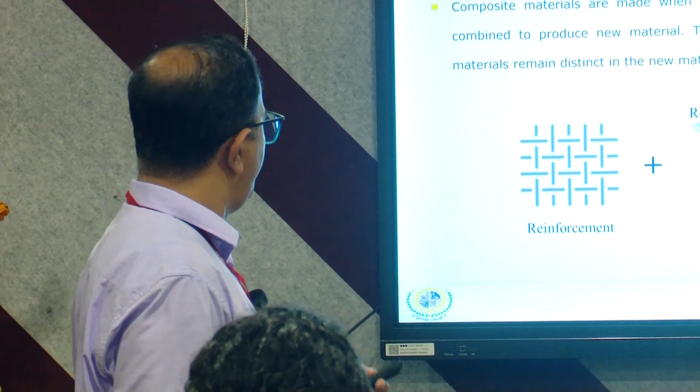So, we know composites are reinforcements plus matrix together. That gives rise to composites. Now, as per our previous discussions, often fibers contribute more towards the strength rather than whatever matrix or polymer we use. So, when we go through mechanical testing, we have an idea that results may come out in a particular trend based on our exposure to the literature.

But when we try to characterize it, get deeper into it, study the microstructure, there are n number of things which may be affecting that particular value of strength. So, when you get a quantitative value, there are many qualitative issues which contribute to that value. Sometimes you must have come across a situation wherein we try to report something and we find that in literature they come up with a slightly different trend. So, when you only put up the quantitative values, those trends may slightly differ when we compare with our results.

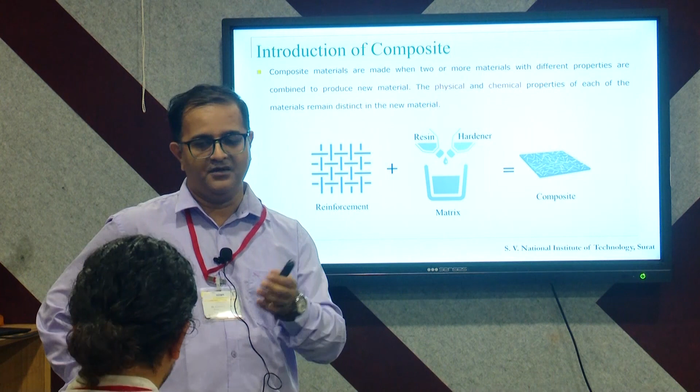The reasons may be n number of things. The way we have made a composite and the way somebody else makes it, there would be some difference. Now, just imagine the demonstration we had yesterday, when we infuse the resin in a vacuum bag and then we allow it to cure.

Definitely today's weather will have its effect. Since yesterday evening the weather has slightly changed, and because of that its effect will come on it. Now, that is a noise factor; we do not include it in our consideration, and once we go for testing we also forget what the situation was on the day of curing. So, that may not be the case with somebody else.

So, the way you fabricate a part and test it at a certain place, you do not have control over the environment. Similarly, there are many other factors which come into the picture. Even with the same type of raw material, if you are procuring from different sources, you get some different result. That is also one of the vague observations which we have made. So, only a quantitative value often leads us to some sort of error.

I remember in one case, in one review of one of our papers, the reviewer doubted our results. I do not say that he doubted our efforts, but he had doubts on the results, and he concluded all his confusions into it, and he asked why you get this result, I am not able to agree to it. So, what we did was we measured those things again, we recorded it, we video recorded it, and with our reply we attached the video.

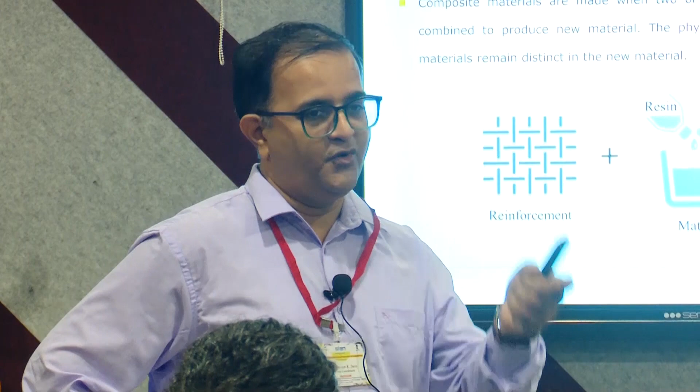And after the 6th review that paper got published. It took almost 2 years to publish a paper. So, now when you see that paper, you find submitted on so and so and accepted on so and so, and the difference comes out to be almost 18 to 20 months. So, the thing was, a value can always be doubted. Just because the machine changed, the way that machine was able to measure something was different. So, often it results in some sort of confusion when we only concentrate on quantitative value.

Now, that happens more when the part is composite, because it can have natural fiber or it can have man-made fiber. It can have particles. Particles can be nanoparticles, they may be conductive, they may be magnetic, they may be something else. You may be mixing two polymers if you are going for the SLS process, and those polymers would have their own individual way of behaving with temperature, with heat. So, n number of possibilities you come across. If I talk about nylon as a 3D printing material and nylon as a whole which I get from the market, the grade would remain the same, but they will show different results to me. Now, when I want to make a comparison, often the trend line does not match.

So, when you see the papers on polymer composites through 3D printing, you will always see that the trend lines are quite different. Maybe you can refer to Raghav's report in the lab. He has put up graphs. The other guy, maybe Arjun, has put up the stress-strain curves, and if you see those curves, everything is totally different. They do not come to a single trend. Same material, the exposure time changed, the way you exposed them for curing changed, and a large number failed because of that. Now, that you cannot put in a paper.

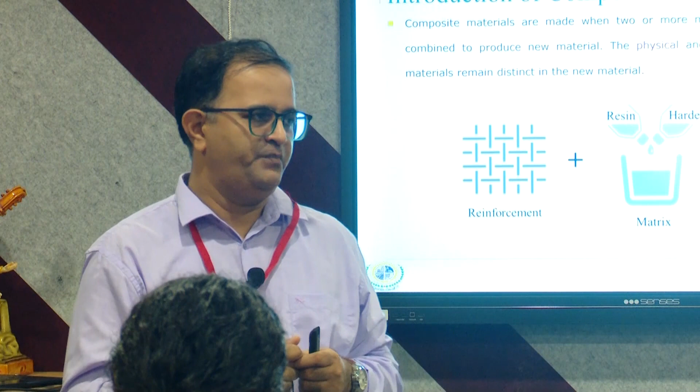So, in such situations where a value does not help us to conclude some result, characterization comes into the picture. If you go into the microstructure, get into the structure yourself and just try to observe it, it may give you the results: something delaminated, something got pulled out, there was no affinity between these materials. If you see those things, you are probably able to make a good judgment with the value that you get through the measurements. So, in such situations only focusing on, say, mechanical testing may not be enough.

Often we feel that I did all these things which are there in so and so paper, I did the same thing, I did 2 more tests than them, but still my paper did not get accepted. Why so? Probably the reviewer wants something to substantiate our results. So, there characterization one way or the other comes into the picture. Nowadays, because of the grants which DST has been disbursing everywhere, good facilities are coming up in almost all regions. So, we can easily utilize those facilities to get some characterization results and include them in our work.

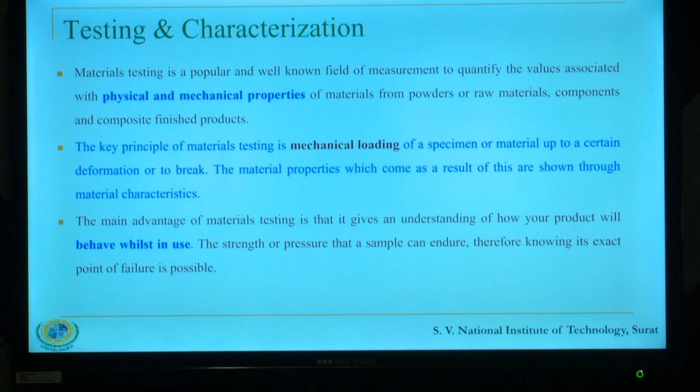So, when we talk about the testing of the materials, we largely concentrate on quantifying the physical properties or mechanical properties, and these values in most of the cases come through mechanical loading. A part is loaded mostly in the axial direction, and because of the deformation that occurs, it gives certain results to us, whatever be the process. In all those processes, we are required to load the specimen under mechanical action.

So, in almost all the processes there are standard specimens, standard dimensions. Of course, they have a certain range of dimensions, but those are standard dimensions, and it is expected that the material would actually behave similarly to the results we obtain when it is put in the application. So, that is why we intend to carry out these mechanical tests.

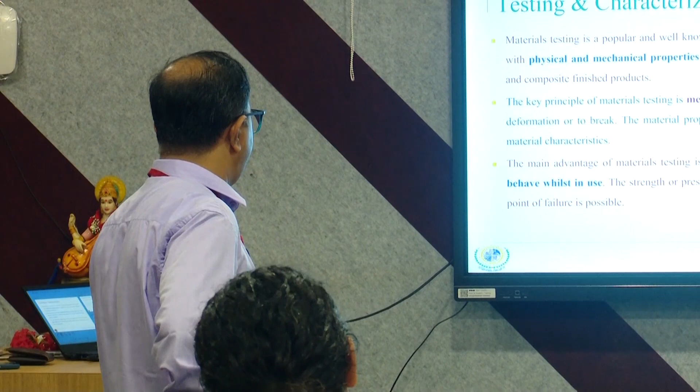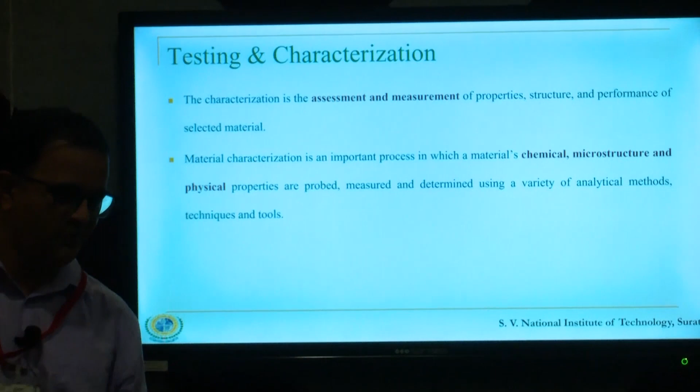Now, as compared to that, when we talk about characterization, we not only restrict ourselves to physical or mechanical properties, but we go beyond that. We want to not only measure, we want to assess the internal structure, we want to assess the performance. And by internal structure, we mean the way in which heat flows into it, the way in which the molecules are arranged, the way in which the grain boundaries are defined, the way in which electrical conductivity takes place, the way in which the structure behaves, maybe under impact or under continuous load.

It can be anything, but the thing is we want to assess what we are not able to see through our naked eyes. So, along with physical properties, we also concentrate on the chemical properties and the microstructure of such parts.

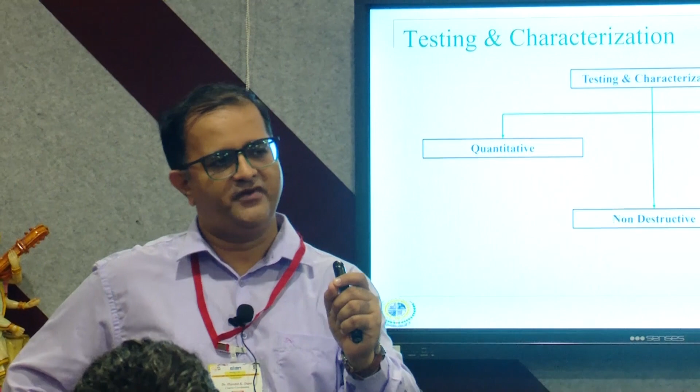There was one interesting result yesterday which we had discussed, how a continuous fiber was put in between polymer when we passed them separately through the nozzle to print. Ideally the continuous fiber should be covered by the polymer, but through some microstructures we observed that it remained on one of the sides, and because of that, it becomes a place where it can fail, because it is easier for the fiber to get pulled out from the polymer. So, that we come to know when we see it.

Had there been a situation where the fiber was perfectly placed at the center, then it would have given a different range of strength values. So that difference is visible through such microstructure analysis.

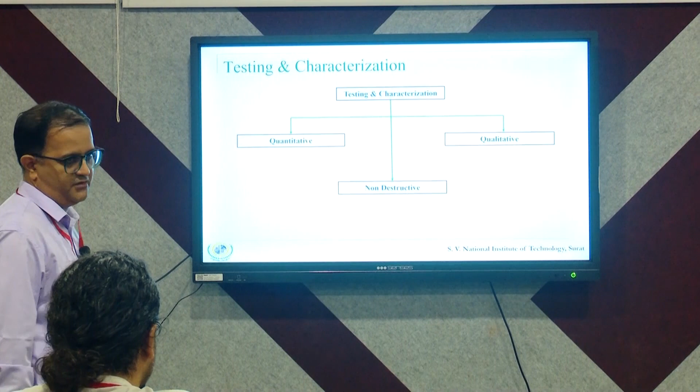So, all the processes which I want to discuss right now, I am trying to put under three different banners. This is not the only way in which we can classify them, but this is how I have tried to combine them in the further slides. So I wish to talk about quantitative methods and qualitative methods. Non-destructive is something which I am not touching. Altogether that can become a separate session, so I am not discussing it in this session.

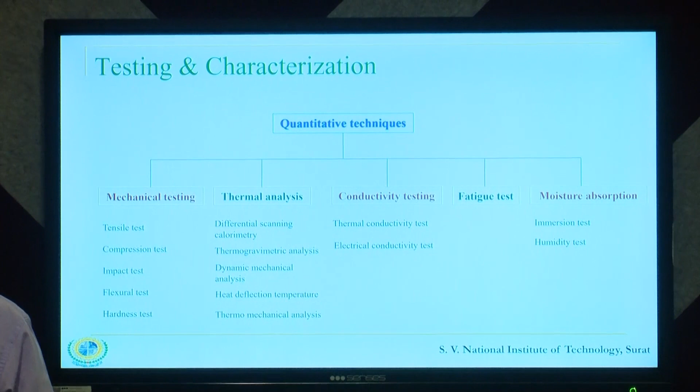There are many more processes which can be included in this list, but these are a few of the processes which are being referred to regularly in recent times. So we tried to include those techniques. Largely they are mechanical techniques, thermal analysis, conductivity testing, moisture absorption.

Fatigue test is something which is debatable, and I had a debate with my friend about why we don't put it under mechanical testing, and he showed me two online books where there were mechanical test and fatigue test separately. So the only logic, which I also agreed with, was if a professor can keep it separately, why can't we also keep it separately? So I went with his choice, but it comes under that domain only, and we kept it as it was available in one of the resources.

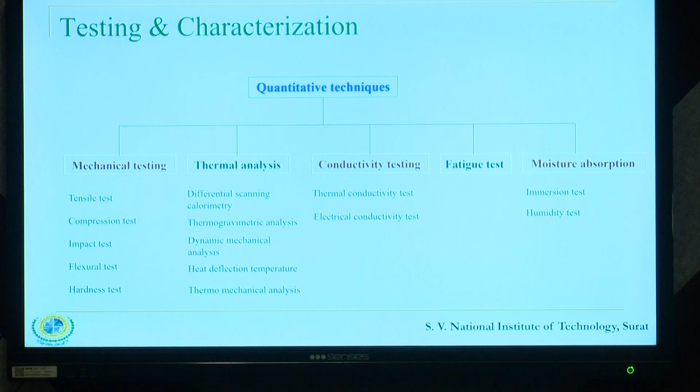Now mechanical testing, this would be a revision for all of us, because we have gone through all the processes at one time or another. When we are trying to study the behavior of materials under different loading situations, we may choose certain processes for specific study of mechanical properties. So we may go for tensile testing, compression testing, flexural testing, torsion, creep, hardness, impact, and fatigue. These are the things which we would largely concentrate on.

Now it depends upon what specific raw material we are targeting, and that particular raw material may have a specific application, and for such an application we may be required to go for specific tests. A few days back, I had a long debate with Janish. He wanted to conduct open hole tensile testing as part of his MTech dissertation.

So we have carried out impact testing as well as tensile testing in his work, and he said that, sir, I have time and there are resources, so let me also go for this open hole tensile testing. So my question was, if you are working on Kevlar, why do you want to go for tensile testing? Kevlar more or less has such applications where it has to undergo impact. So if you want to study impact, go into more detail of the impact study, why do you want to go for it? Then we stopped that discussion, because we got busy with the program.

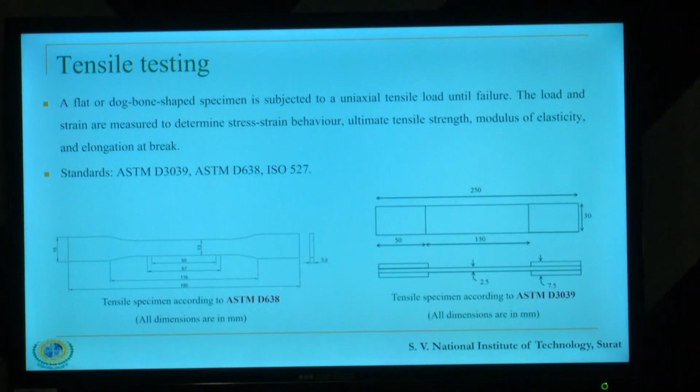But more or less, there are certain standards which are being followed for tensile testing, and in certain conditions we need to go for a dog bone shape only, and in some cases we go for flat specimens. So, accordingly there are two major standards, D638 and D3039. Now, there is an interesting thing: when we go for D3039, and in some cases with a dog bone shape also, we require to put a cover on the edges. What do you call that cover? Yes. So there the requirement is that it should be made from the parent material.

Now, when you 3D print that part, how do you put a parent material on it, unless you include it in the design of printing? Only when you put it in the design can you have that cover. So, altogether when we use a 3D printed part, we avoid going for that, and it is a usual convention. But when you make the same composites by some other processes, then it is a requirement, and if you see the literature, they would say that as per the standard we have put it up.

In our case also we had used emery paper, because the base parent material was slipping when we were trying to hold it. But in the same situation with 3D printing, you do not do it, because how would you create a cover without printing for a printed part? Now, if you include it in the design, then it is against the dimensions that are required. So, those things are always debated.

Even I put the same question when I am a reviewer for some paper, why you have not included it, and it is always interesting to go through the answers. It helps because when you have to reply, you have n number of options by getting such replies. So, there are many open ends where they can work further in defining the standards.

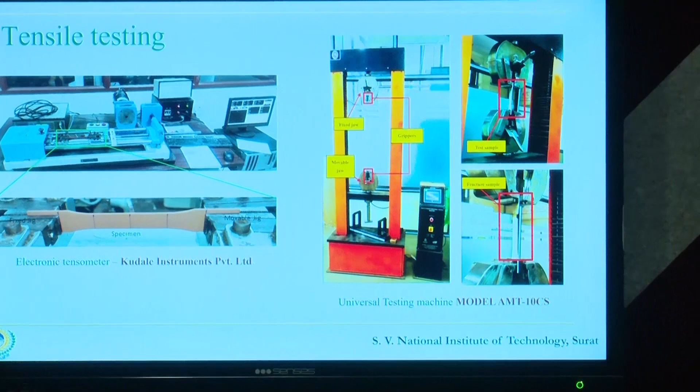It came to our department in 2005, and it was the only machine that was not affected by the floods of 2006. Everything else in the workshop and manufacturing section was underwater. It was saved because it was light in weight, so they thought, let us put it on the first floor. So, this was the only machine in our workshop and machine tool lab which went to the first floor and was saved. Everything else was in water, including faculties.

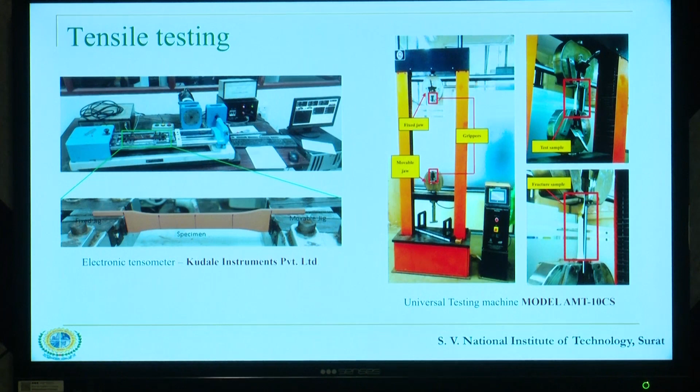Since 2005, this machine is working effectively even today. No major repairs, some changes of spares, and we go for regular servicing of it. We go for regular calibration of it. This is a good machine that way, and it is a cheap machine. Even today it comes around 6.57 lakhs only.

Is it adding anything different from this? No, the thing is, it can go up to 20 kilonewton. The load cell is up to 20 kilonewton only. So, it serves our purpose. But you can conduct tensile, compression, flexure, shear, everything. All attachments you can have into it. Yes.

That would be interesting to see. They will show you. And why in some specimens do we do that open hole testing? Open hole testing is specifically planned when, in the design you have, a part is to become part of some assembly, and that part will definitely have a hole into it so that fasteners can be attached to it. That part behaves well, but whenever it fails, it fails at that hole only.

So that is why for certain applications where you need to design a part with holes into it, other than tensile testing, we go for open hole tensile testing. And there are two different dimensions of the hole also, so there are two different sets of standards for studying it, depending on the conditions that it will undergo. And it was interesting when we tried to study the same for 3D printing.

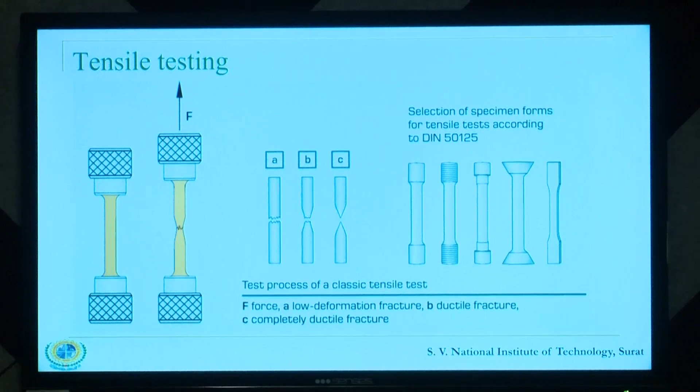It's also known to us that as per the standard there are different ways to prepare standard specimens. I hope I am not restricting your view. We will be able to select different shapes and forms of standard specimens.

The way fracture usually happens is in 3 ways: a low deformation which leads to immediate failure, sometimes necking initiates and then we see failure, and sometimes necking extends to a very high value before failure. In each case we see a separate type of stress strain curve, which is always interesting to interpret, but in general this is the stress strain curve that is commonly used.

I will not go into that detail. So these are the 2 different tests that have been performed at our lab.

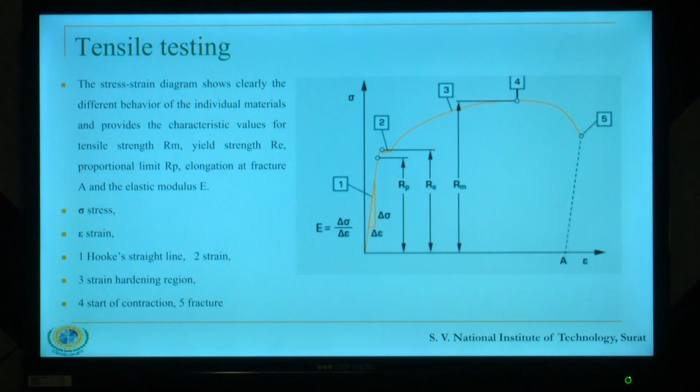Did it break? Yes. When did it break? Let me see first. Yeah, that's what I was saying, because when I use a laptop I usually keep the voice off.

Interesting, huh? Who did this experiment on natural fiber? The whistle was good, I suppose. So I think this is the copper infill PLA copper, okay, and this one is the natural fiber, I suppose, jute and flax, I suppose.

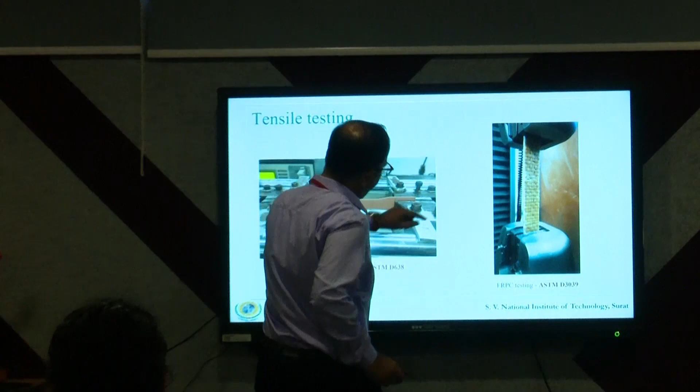The thing is, the dimensions get a certain range. So when we go for cutting, if you're working with a certain size of fabric and cutting it into the minimum size, you only get 2 strands of it. You may cut it this way and get only this much portion. That won't help us get the desired result, because it's going to fail immediately and delaminate very soon. So you need to go for extreme dimensions.

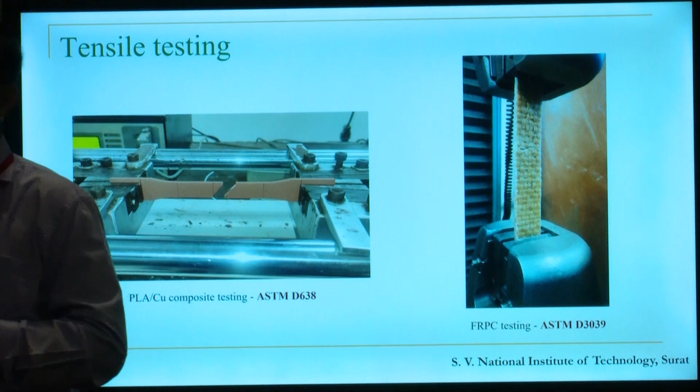Rather than selecting this standard, we went for another standard. The first results came from experiments with the metallurgy department at IIT Bombay, who suggested it's better to go for another standard compared to this one. Creating a dog bone shape was also not a good idea, because ultimately those are fabrics.

If you cut it at a particular position, there are chances those portions may get pulled out easily. So these are cut by abrasive water jet machining.

Laser was an option, but we observed that at the edges the fibers were burning, turning black, and those portions were getting burnt. We also observed that the resin burns too, creating a foul smell. So we avoided that, and that was one reason. The other reason was that the machine was available with us at that time, so that was a better choice.

Eventually, our abrasive water jet machine went into maintenance, and we had to seek support from outside because we had initiated with abrasive water jet. So we had to use that, and when we went for outsourcing it, it became even more expensive than laser cutting. But you cannot change the strategy somewhere in the middle of your work.

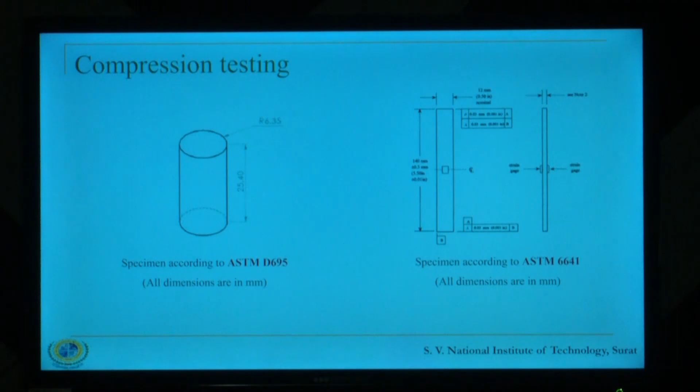Same way for compressive testing, we have different standards. Usually D695 is what we have used. There are two different sets of standards depending on what dimensions we produce, and by and large, especially for 3D printed parts, D695 is the standard that is preferred. The reason being that the design is simple, material utilization is less for printing, and you get better parts, maybe faster printing also.

Usually compression test is not meant for metallic parts. Tensile tests give you the required information. So compression is largely for those materials which are used in building applications, or maybe those related to polymers.

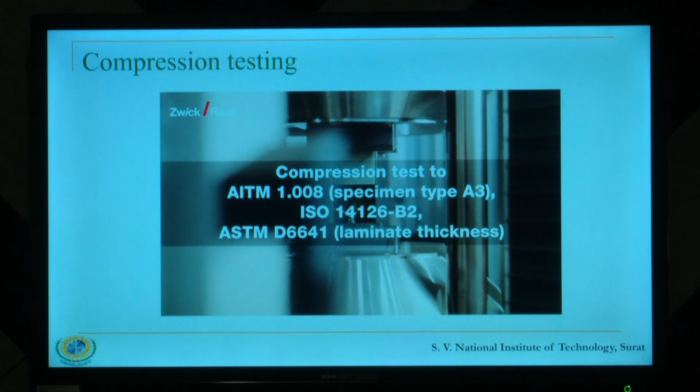Same way you have a standard curve for this process also. Now we are outsourcing the compression testing, because ours were not that clear to put up. In compression, you observe more of delamination as compared to tensile testing, so breaking of the fibers is often not the case.

Flexural testing is an interesting test to do, because any part that gets into applications where there is more of dynamic action has to either undergo bending or twisting. So when we go for parts where different 3D printed parts have to become part of an assembly, it is necessary that we go through the bending of such parts.

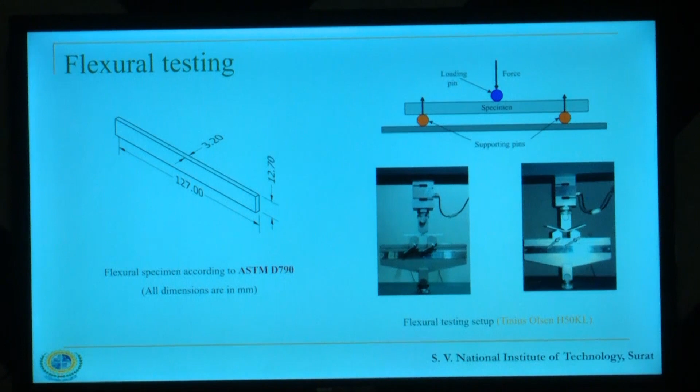Now, when you see these dimensions, these may be the dimensions we selected for this task. It may not be only 127, it may be a range of values, and from that range we may have made a selection. Sometimes there is a thumb rule into it: the width that you select gets into a thumb rule for the length or the other dimension. So to set a minimum value of width, along with that a certain length comes into picture.

The other day I had discussed that in order to achieve a certain thickness of a test sample, you were required to place 12 layers of fabric. Yesterday we tried with 6 layers, I suppose, but for the specific thickness required, you needed 12 layers. So that became a limitation, that now all planning has to be done with 12 layers. You cannot go for 14, you cannot go for 10. So the study goes with those 12 layers accordingly.

So once you fix up a certain dimension, the other dimensions come into picture. Otherwise, why would there be 127? Somewhere I also remember that the dimensions came with 2 decimals, and then that was rounded to the higher full value. So those are things, but then we have flexibility in a range of the dimension, and we have to ensure that dimension falls within that range.

Suppose we are having a gas turbine blade, and in the gas turbine blade we are putting high pressure gas. In that case, it will be fixed at one end, and it will be bending as well as twisting. So these two different forces, how they will be coming in this test, is shown in the diagram. The part under application, if it is undergoing some sort of bending, you may have made that part following certain safety standards. So we always take a certain factor of safety, based upon what maximum bending would be encountered by the part.

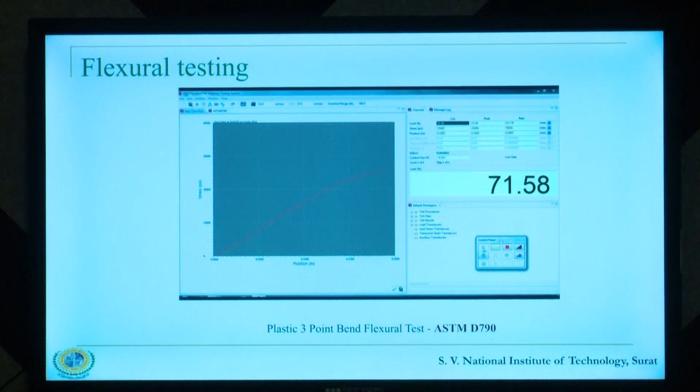Now there is another interesting thing. We have two machines for impact testing. One can work up to 25 joules of energy, the other can work up to 100 joules of energy. The suppliers are different, the softwares are different, so their decimals are different. One has 3 decimals and the other has 2 decimals. Because of that, the graph that you get is totally different.

So if you want to compare a part, depending on selection, if it's printed with carbon fiber or even glass fiber, it does not get checked with a machine below 25 joules. If you check those parts with the other machine, it will give you data you will not be able to compare. So even the softwares with the machines, the way those machines are used, they give you a different perspective on the same job when you carry it out on 2 machines. This is why we have big factors of safety, because we are not very sure about this.

Traditionally Indians have always tried to play safe. We have very big factors also. Yes. That's why in the space program also, this factor of safety is not... Yes, yes, yes.

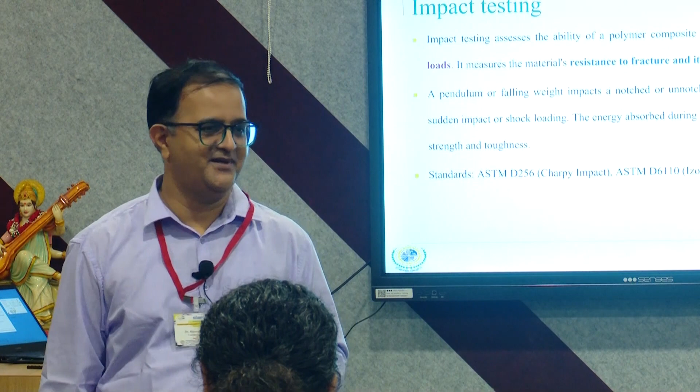So there are many observations which you cannot put on a paper, because you do not have anything to back up those observations. You can only discuss them, but you cannot put them on a paper. Impact testing is another interesting thing that we can carry out. Are we going for that testing now?

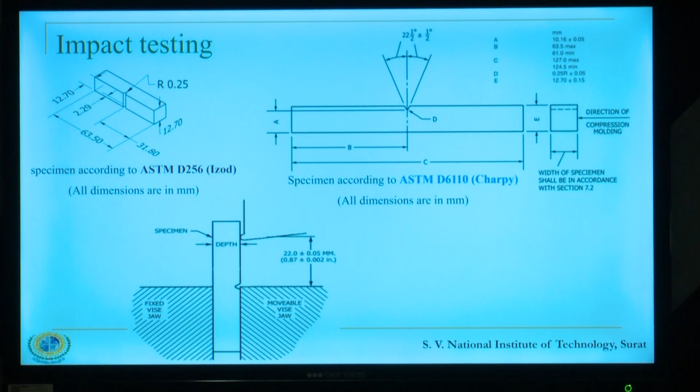So again, there are these dimensions. You see 31.8. That may not be the defined dimension, but it may come from some other dimension. When you define thickness and width, accordingly you define the length. Here you see dimensions A, B, C, D, and D has R in it. So the dimensions are interrelated, and they should fall within a certain range. That is a requirement. Again, some standards require a notch. In some cases, you don't.

No, even I thought when it comes down, it makes some noise, right? When the movement starts, before it strikes, you release it. Sir, it is the noise of that. It is able to move quickly. Yes. So when you release it, it has that noise, and then when it strikes. But then what was the third one? We have to stop it manually. That is not standard. So this machine can be used up to 25 joules.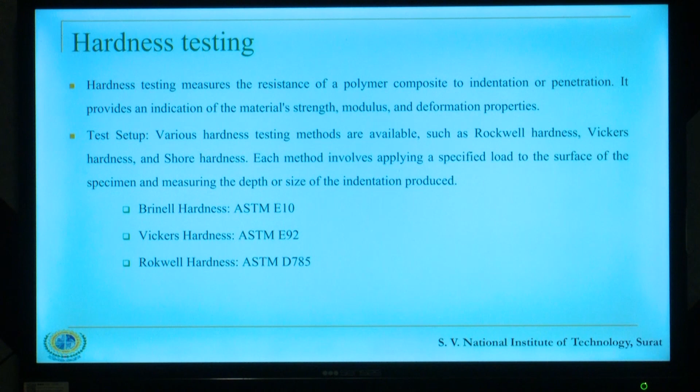Hardness: usually we go for 3 different sets of hardness testing depending on different conditions. Often this goes with the facility that we have. In case of Brinell hardness, our indenter is a sphere. You measure 2 values of the diameter of indentation, and it gives you the value.

In case of Vickers hardness, the indenter is replaced. Instead of a sphere, it is a pyramid. So there the diagonals of the square are measured. If it indents less, the value of D is reduced. If it is a softer material, it will indent more, and so the value of D will be more. So those 2 values are measured and the calculation is done.

When we did these experiments during our BTech first year, we had to observe, measure manually, take those values and do the calculations. But now machines do everything by themselves. They do not rely on us.

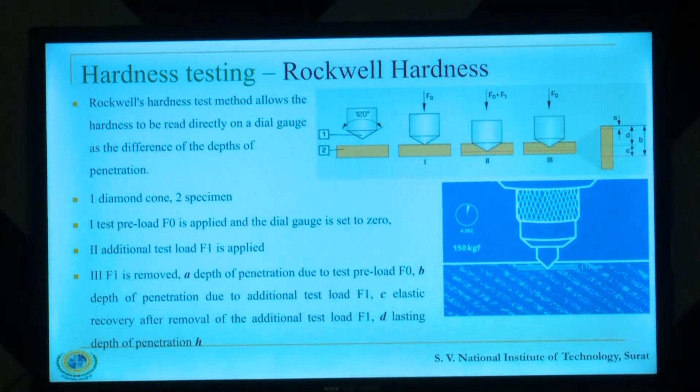And here you are required to do some calculations, but again nowadays software does it. This is interesting because you go for two different levels of indentation, and in that figure, if you see, D is the value that you are interested in. So initially when you put the first one at the first layer, when it is F0, it goes up to depth A, and then you add some force into it, it goes up to B, and when you remove that secondary force, there is some retraction, some reduction, and that reduction value is C. So D is something that we are interested in.

This may be something which may support when we are going for parts with reinforcement, but we do not have this setup. Thermal analysis is an interesting part. Up till now we were not that much focused on this study, but recently we got one machine in another department. So for the last 2 years we have been trying at least one sample and getting some information out of it. It is adding more information to our knowledge base, and of course to the publications also.

So there are many tests in fact, but there are 3 tests which are widely included. One of them is TGA, thermogravimetric analysis. In this thermal test, the machines are so sophisticated that you can fully rely on the results, and the other thing is there is minimum involvement from the operator. So reliability is increased a lot.

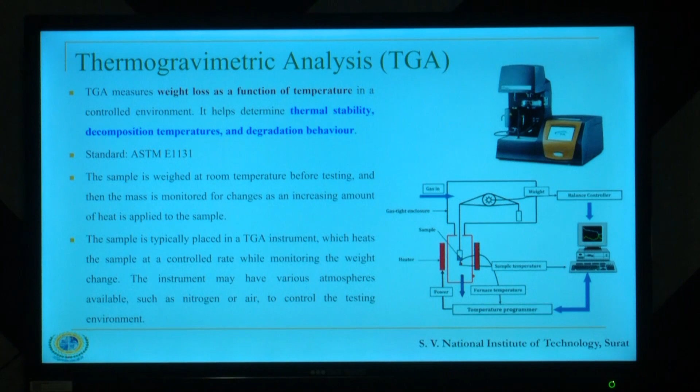So when we go for a TGA test, our intention is to study the weight loss of a part with temperature. So we have a setup wherein we put a small sample in a particular way. It is placed enclosed in a heater, a furnace sort of thing, and then the temperature is given over a regular course of time, and because of that heat, whatever is the loss of weight, initially you measure the weight, later on you measure the weight, and that loss of weight will give you some idea.

So this goes with the thermal stability, the temperatures at which some sort of changes come into it, decomposition comes into it, or how the part gets degraded. Degradation comes because there may be moisture in it, and its removal will also result in loss of weight. Sometimes the part may even partially burn. So those things are represented through a thermogram. So here, as you increase the temperature, there is reduction in weight.

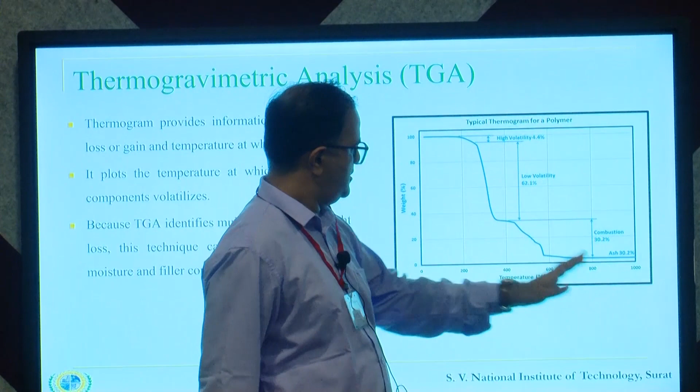This is a graph for a particular set of polymer. So if the weight is say 10 grams, percentage-wise it is 100% right now, and once you start heating it, the weight starts reducing, and initially there is some loss. This curve denotes a certain aspect of it, then the steep curve also denotes something, then it denotes something else, and then it becomes stationary. So whatever loss comes into it is represented by a curve, and we are able to make certain judgments from the curves.

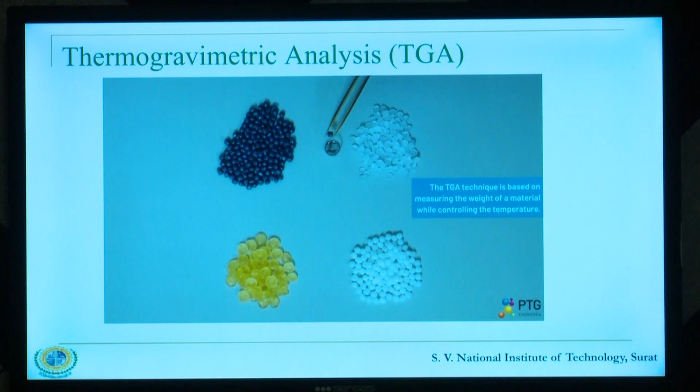This should be before my presentation. Yeah. Actually that was our plan. Our sequence was right, our actual sequence was right. Your presentation had that chart also.

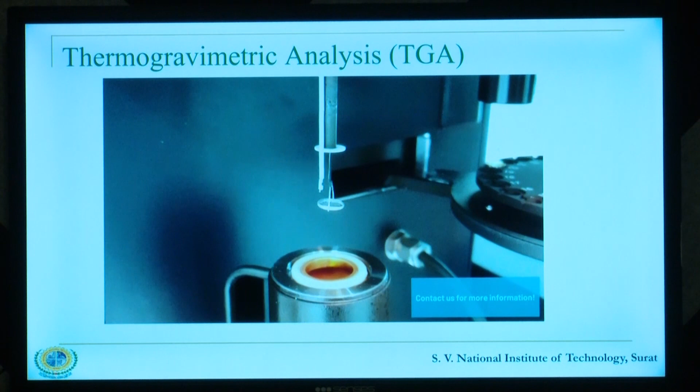Anything else? Interpreting. Yes, in any sort of system where you are using a machine, interpretation is the only thing. Even in SEM, you would see many images, but they are left without interpretation. In the papers also, if you see, believe me, it happened many times.

And the thing is, if I make certain judgments for my graph, this is a hard fact, you yourself do not know how to interpret it, so you have no other option as a reviewer but to believe what I am saying. That happens. Very difficult to prepare the graph, the thermogravimetric analysis, and to make the detailed explanation. Yeah. So, interpretation.

I'll tell you another example. There are a lot of connections with the other properties you have to explain with the reviewer request. Yeah, but if the reviewer puts up a question, then you include a reply to it. Otherwise, it goes unattended, and then thousands of people refer to it, and then they copy, and it continues. See, take the example of a statistical process, response surface methodology.

When you use software and feed your experimental data into it, immediately it will give you an analysis; it will prepare a model and an analysis of the model. Then it will give you a linear equation, 4, 5, 7, 10 lines of an equation, all parameters included, and it gives you a 3D plot. People represent it. Many times I have put up such questions in reviews or in the exams that I conduct at our place for our PhD seminars.

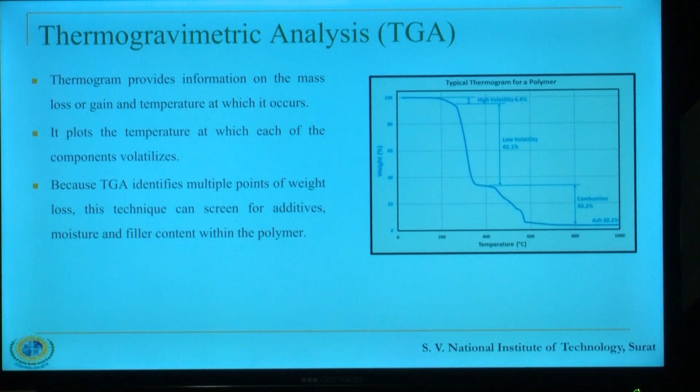Because the TGA that I have referred to, they are for polymers, mostly for non-metals, I suppose. I am not sure, but I have seen it for non-metals. Have you come across it for metals? Ceramics, yes. I'm not sure. Okay, but fillers or ceramics, full ceramics.

This is another thing, DSC. Here the study is about the heat flow, especially when there is a phase transition. So how the heat flows, does it get stored, does it get removed, does it flow promptly? Those studies come under this. Say for example there is a sample that we want to study; it has to be compared with a reference material, and whatever heat flow happens because of that reference is what is studied.

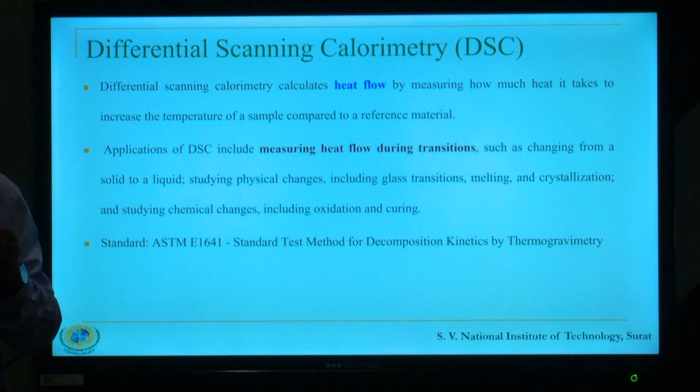So when we try to change a sample from solid to liquid, or when we are studying certain physical changes, whatever flow of heat takes place is included. This is one such setup wherein there is one sample, the other is reference, put in an enclosed situation, the test is conducted, and the flow of heat and the difference in temperature is measured: heat flow versus temperature.

So these are the changes. Glass transition takes place, then crystallization, then melting. So at different conditions of the phase, the flow of heat is studied. These thermograms help us make certain specific conclusions. Personally, I haven't included this in any of our studies, so I haven't interpreted it for any of our results. So what is the reference material? Reference material specifically I do not know.

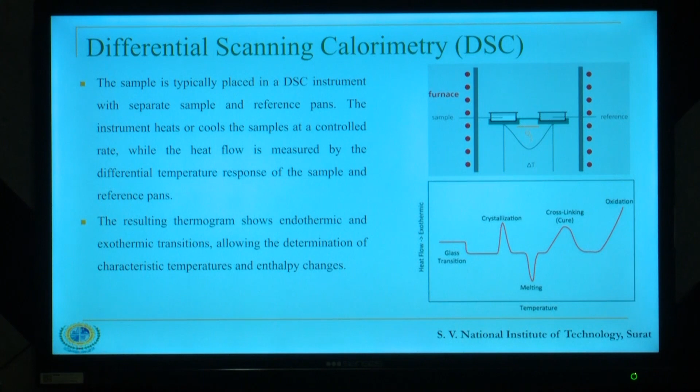Yes, sir. Yeah, I can send the reference. Okay. If you want.

Of the polymers. This is the aluminum pan to measure with the differential scanning calorimeter. There are about 10 videos by this group, and they are really very interesting. I do not know who the person is, but he is explaining very well. It's on YouTube. Yes, I can share the links. I am going to share many of the things.

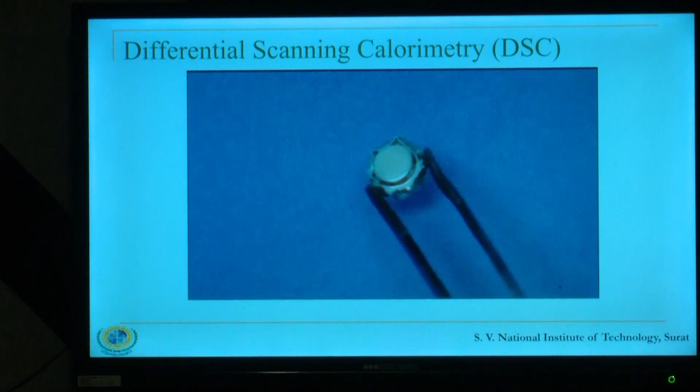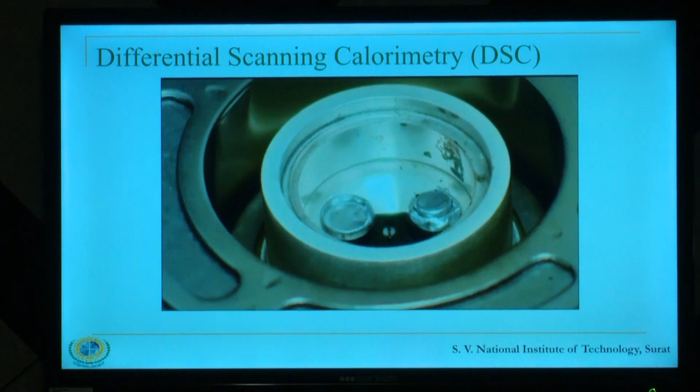Here is the DSC instrument. We bring the sample sealed inside the aluminum pan. Open the cover of the DSC instrument and get ready to put the sample on the right side. Depending on what sort of study we want, maybe we need to create a nitrogen environment, and in some cases we also allow regular air. Sometimes we need to avoid oxygen; that choice goes with the type of material. Then we are ready to start the DSC analysis.

Depending on the thermal properties of the sample you want to measure, you can set the software for the tests you want: standard, for the determination of the total heat of reaction, or modulated DSC, also known as MDSC, for properties such as the Tg value, the melting temperature, and the degree of crystallinity. The DSC analysis is done under nitrogen gas to minimize oxidation reactions and obtain only the thermal properties associated with the polymeric material.

The glass transition temperature, Tg, is the temperature at which an amorphous solid becomes brittle on cooling or soft on heating. The degree of curing determines the amount of the sample, percentage weight, that is cured or polymerized. The degree of crystallinity is the amount of the polymer that is amorphous and the amount that is crystalline, percentage by weight.

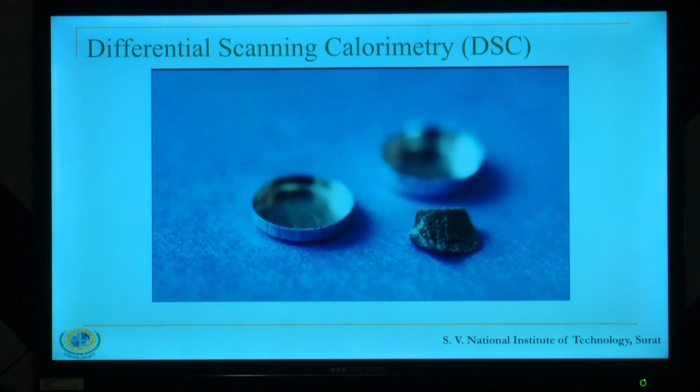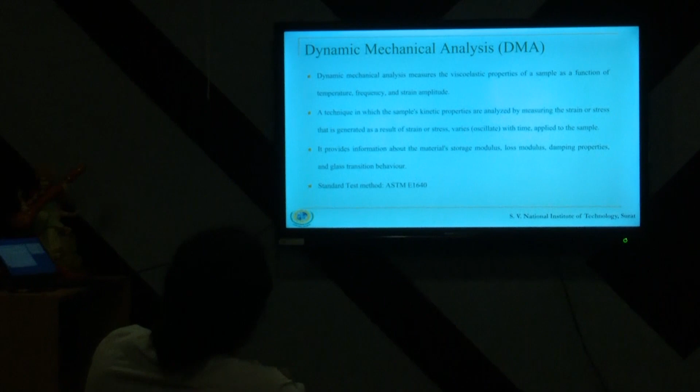The third test is DMA. Again, we haven't tried this on any of our samples, but dynamic mechanical analysis is for viscoelastic properties of a sample, as a function of temperature or frequency and strain amplitude. I'll go to the figure. So this is the setup. The part has to be of a certain dimension, held properly between fixtures, and then heated.

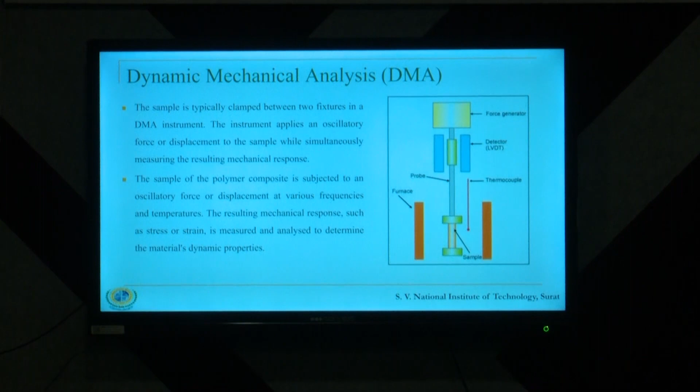When we place it between these fixtures and pass it through this heater, in some cases we prefer to give it tension or compression, sometimes to twist it, sometimes to bend it. Under that situation, the strain response it gives is measured, and that helps to measure some of the dynamic properties of the part. So, under a UTM also in a chamber. Okay. Is that temperature range different when you compare to DMA?

No, that would be different when we are using it on a UTM. What do you call that setup that you enclose, that chamber? We had planned to get that one, but funding restricted. You have that separate chamber wherein you can control the temperature. What do we call that? Environmental chamber? No, it is a very good name. I am not recollecting it right now.

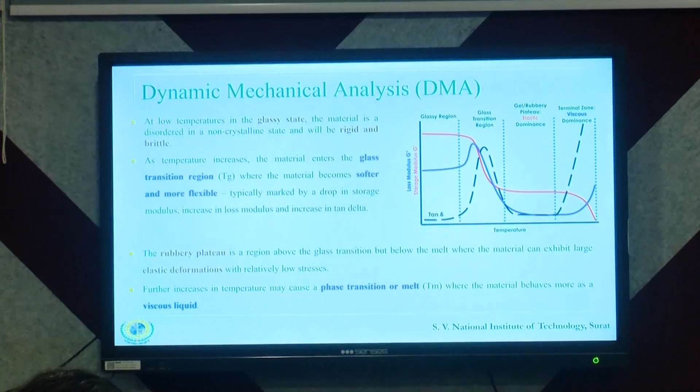Okay, but here what we do is there are four different stages that come into the sample with the temperature, and in all those stages the material has a different structure. Initially a polymer may be rigid and brittle. When it goes to a higher temperature, naturally it becomes flexible. Further, it undergoes large elastic deformation, and then at the end it is almost in the molten state, the viscous state.

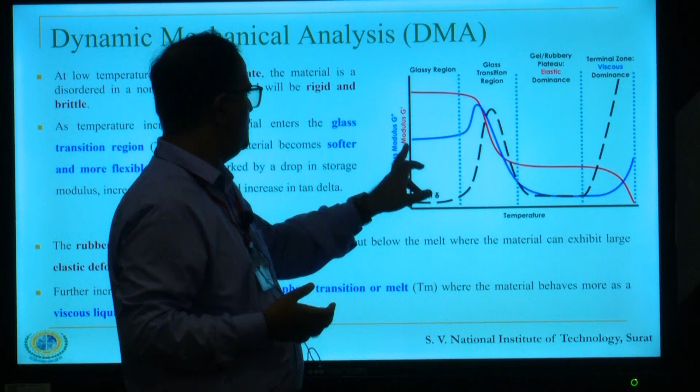So there are a few things that we observe. The storage modulus, how the energy is stored by the material. The other is the loss, the blue one, the loss modulus, how the stress is reduced inside the material. So that talks about the loss part. This has something to do with the ratio of this part, but I am not clear about it at the moment.

So these are certain results which give us information about how a part behaves when it gets into the transition phase from solid to, say, viscous state. That information comes through this phase change of the part through this test. Again, we haven't worked on it, so I do not have my own results for this.

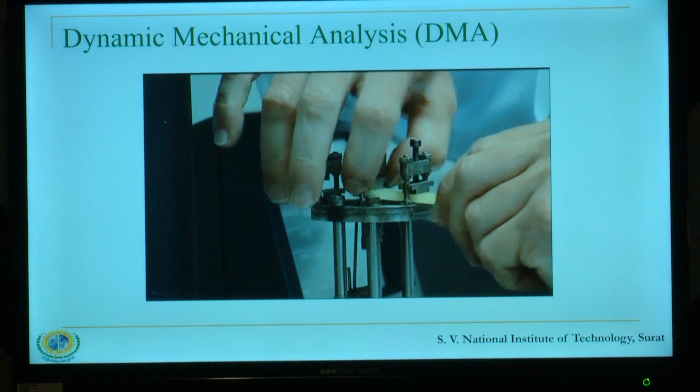Inside the dual cantilever of the DMA instrument, we just put the sample inside and tighten the screws of the dual cantilever in this fashion, using this special screwdriver. You tighten until you hear the click, which indicates the right pressure on the sample inside the dual cantilever. Once the sample is properly mounted in the dual cantilever of the DMA, we close the furnace of the instrument and go to the computer.

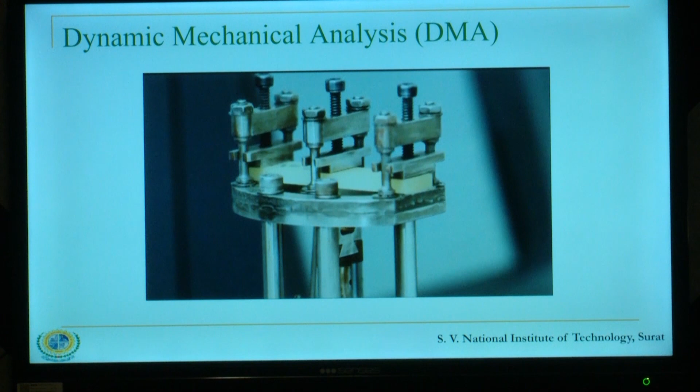The DMA applies force sinusoidally at several frequencies over a temperature range. As the sample deforms, displacement is automatically measured. The magnitude of the applied stress and the resultant strain are used to calculate the stiffness of the material under stress. Once all the parameters have been set up for the DMA analysis, the test is run, and at the end you will end up with different values of the samples, such as the storage modulus, loss modulus.

Storage modulus is the measure of the sample's elastic behavior, while the loss modulus is the measure of the sample's viscous behavior. The ratio of the loss to the storage is the tan delta.

Sir, I have a question. They are doing a good task, this Australian university. I don't remember being taught this any time during BTech. Probably we did not have these machines then, at least not at my time. I am not sure about you. So, are they being taught now? No, we just touch over it, no details.

So yes, in the material characterization subject we have this. They go into detail there, there are chapters. But we still touch upon it, that this is the machine, it is used for something, and this is how the interpretation happens. In fact, we don't have these setups now. Sir, polymer seems to be a very important test. Yes. We have been putting it in our requirements for the last 3-4 years, and hopefully we should get the fund soon.

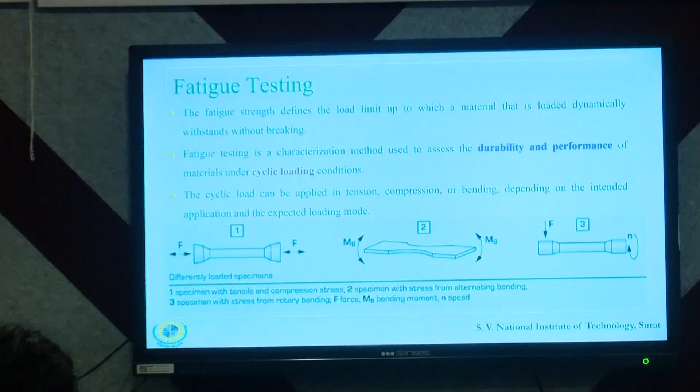So fatigue test: the interest is to know how a part behaves under regular long-term repeated loading conditions, how far its durability is, and how it performs under such cyclic loading. That is what we are interested to know. You can apply it under different situations, maybe tension, compression, bending, and the choice depends upon what application we intend to study.

So there are ways in which we can interpret the graph. It is divided into 3 major sections, and based on that we are able to predict how many cycles will be the normal service life of a part. So if we are going for very high loading situations, naturally the short-term strength is high, and the number of cycles it will undergo would be lower.

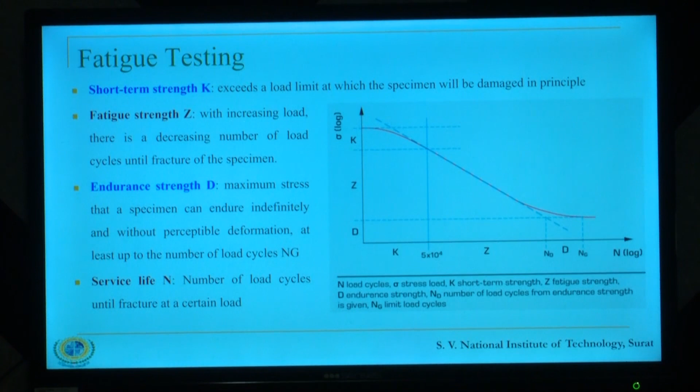If you are able to have something which has very high endurance, it will continue for a longer duration of time, for more repetitions of cycles. Based on this, we come across a certain value of n, for the endurance phase. At this value, we find out certain values of n which denote up to what repeated cycles the part would perform well. Sometimes these tests go for hours and days together, and many industries in Surat have this kind of setup, like L&T.

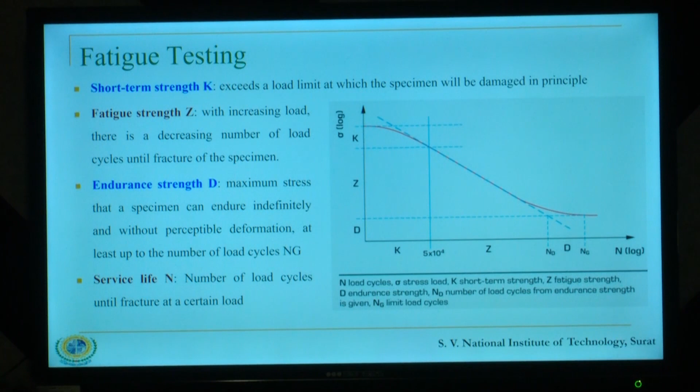Fatigue strength, you mentioned fatigue strength. Let me go to that. Is there a specific formula? Maybe it would be having some formula. Formulas for metals, aluminum, steel - it must be there, I am not sure about it. I am referring to the formula for calculating fatigue strength for polymers. As per the bending equation, 32 M divided by pi d cube - this is the general formula for all kinds of materials.

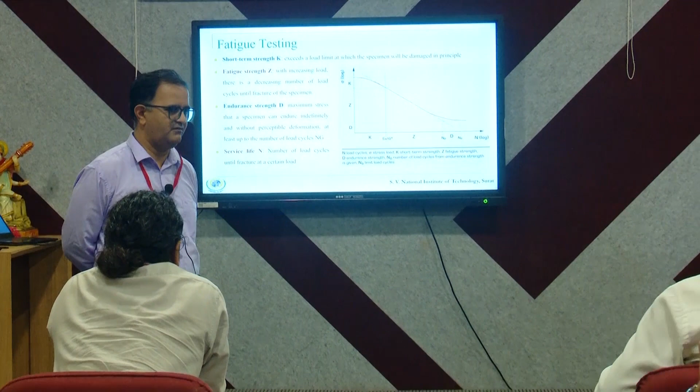Probably it should be similar to that, but I am not sure, because fatigue is something we haven't attempted. The shape has a big influence - the shape of the standard part, but that shape will go with what sort of application we want to target. There are also variations, but those are only for metals, not in case of polymers, as I know.

It would have its own formula, but probably it can come up if there are results, but that is very tedious and long term. When I was in Godrej, they used to do fatigue testing of a lot of items. They used to simply load that part and put it for fatigue testing for days. When I had asked the same question, they said they can't design for fatigue - they have to test the part for fatigue. In fact, L&T does the same thing.

They suggested that if you have your own machines, you can outsource the task and run the machine 24/7 for them. They're actually doing the cycling of the part. So you mean to say there may not be set equations for it? No, no - even for metallic parts, they were doing these kinds of tests.

Professor mentioned the size, the shape - you cannot bring every parameter into the formula, better do the exercise. For metals, I believe there is a standard circular rod and a flat piece where those tests are done. But for application, depending on that application, you will have to make a selection of that shape, and accordingly do the test for that part itself. They make the final part and do the test on it, rather than making it according to a standard - they make the part final and then test it, put it through the life cycle.

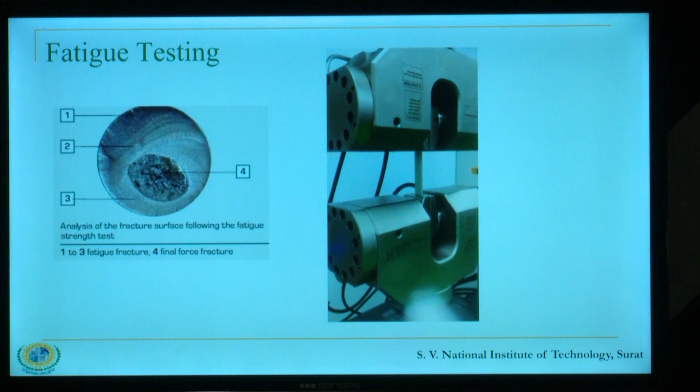What if the part does not break after that many number of cycles? It's a great part, you should under engineer it. And suppose if it breaks at say 75% of the target number of cycles, how do we interpret that? Suppose it's for 1000 cycles, and the part breaks at 700 cycles, how do we interpret that?

You need to change the material. So again there is a range of ways in which we may interpret it, and we may make conclusions out of it.

There is a very interesting question regarding the glass tungsten filament bulbs. When the bulbs were invented, there were 3 or 4 companies. Those bulbs used to never go off, 60 or 70 years was easily their life. So they started engineering filaments of thinner diameter so that the bulbs started failing. There was a cartel, and all the 4 or 5 companies, including Philips, started making thinner and thinner filaments so that bulbs start failing after 5 to 10 years, because otherwise the business suffers.

This particular incident is discussed by Philip Ross in his textbook on Taguchi design of experiments. He came up with this example of filament bulbs and its life and how that is correlated. That is probably one of the rare cases where they engineered together to reduce the life of a part. Normally we want better life, but if it works for too long, then you and the bulb will go together only.

Now I'll go through this conductivity test a bit faster because I also want to cover the qualitative testing part. Thermal conductivity test: we put up a sample for testing wherein we subject it to a light source, a laser source. On one side we provide energy through lasers for a very short duration with very high intensity, and when it moves to the other side we take the measurement. That flow helps us study the conductivity indirectly, because we study the diffusivity, and that helps us make a conclusion about the conductivity of the part. So the flow of heat helps us make that decision.

In case of electrical conductivity, there is a 4-point probe method wherein the sample is connected with four probes.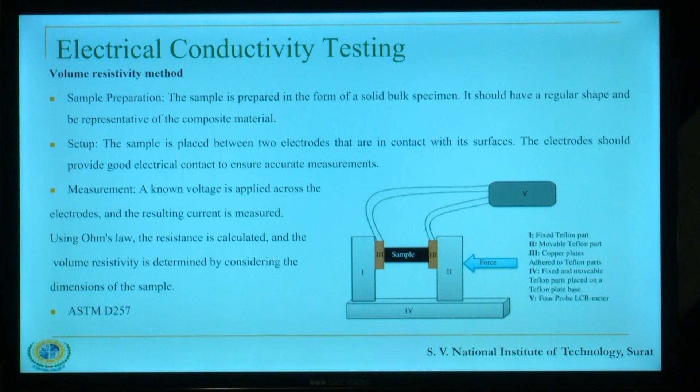Conventionally we can put this on a graph and make that measurement, which is always a practical in electrical engineering. But the machines give you direct results, you don't need to do that manually. Under a microscope, using the probe, we just have to touch and tell where we apply the voltage and where we measure, but that would be for a micro part. For a macro part you don't need a microscope. But again, they do this under liquid nitrogen or other ambient temperatures, like cryo testing, which needs a controlled environment.

Then I come to the last part wherein we want to talk about certain qualitative techniques. These are processes which help us make conclusions, ranging from a small part to a very small part, down to nano dimensions we can utilize this. These qualitative techniques are generally classified in 3 ways: one is using microscopy, then spectroscopy, and surface profiling.

Generally when we go for qualitative study, we do two things: either we observe or we touch. So any decisions we make for a qualitative term, we may feel this page looks bright and this page looks dull, this is white and this is off-white - that is an observation. Sometimes we touch the surface, we touch the cloth and decide this is smooth and this is rough. So we make decisions regarding quality either by seeing it or by touching it. So we divide these processes: some are observing, and some use a probe to touch and give us the result.

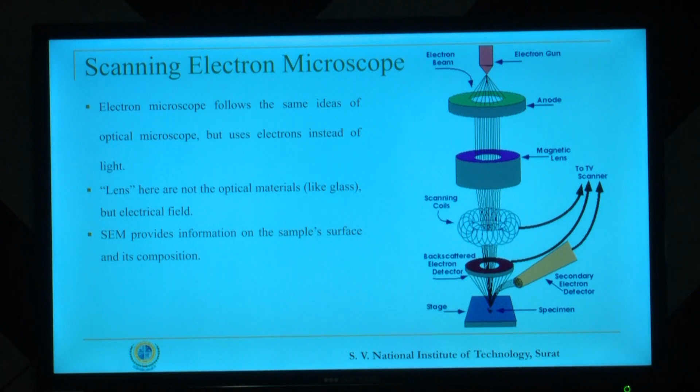I'll skip some of these things because they are known. In this case, what we try to do is avoid physical lenses, but create a lens through generating a certain field. Instead of using light, we use electrons. When these electrons strike our sample, either they pass through it, or they reflect back, or they create a reaction with the existing electrons, and something comes out of it. So there are three distinct ways in which electrons come into play.

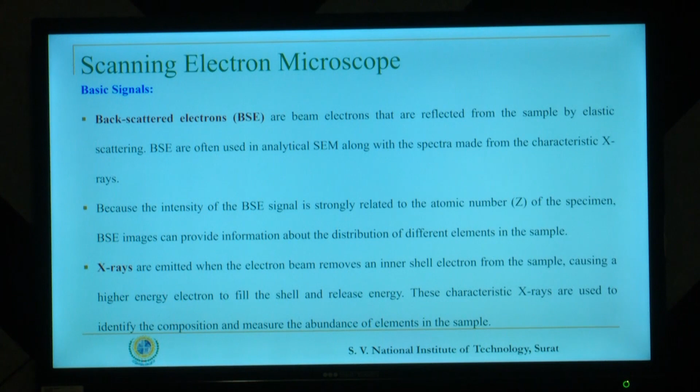Some electrons, when they strike the surface, scatter back and return - these are considered back-scattered electrons. There is a third type: X-rays. When the electron beam gets in and instigates a new electron from the part to move back, that original electron passes away, but gives a chance for the existing electron from the part to move back, and that comes out in the form of X-rays. All three of these are measured.

What we get is the exact structure of the part, so we are able to make measurements. This supports very high resolution, up to almost 3 lakh times magnification, so the smallest impression the part may have is made visible. These are a few of such observations.

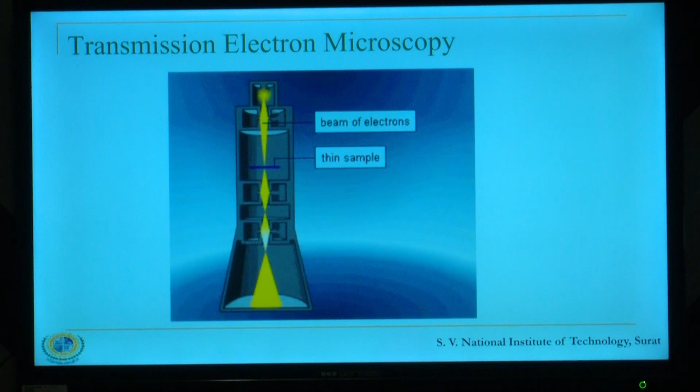Sometimes it so happens that when you want to have such sophisticated setups, maintaining them is a bigger issue than procuring them. There are, yes, they have it.

Now, when we want to go for checking the chemical composition, we pass infrared light through the part using the FTIR setup. Here we get the structures of the molecules and the chemical compositions. In the case of this process, we utilize the magnetic properties of the nucleus. We create a strong magnetic field and try to observe the molecular structure through it. I think you may be the better person to discuss this.

Yeah, it's like MRI. In MRI we form the image, but here, with the currents, what the RF antenna picks up, we take that. But eventually what you get is a graph, and that graph helps you interpret what composition it has. So if you place a human bone, it will give you its composition, or if you place a metal, it will give you its composition. What would be the parts that you would work on?

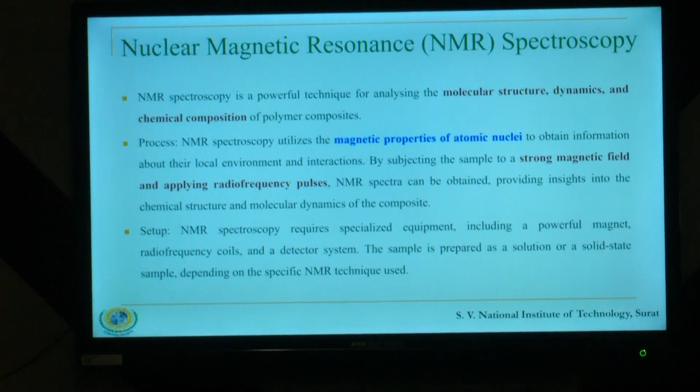Generally, when we do a lot of synthesis in multiple stages, in each stage we put it in the machine and see how much percentage has come and whether there is any change. It gives the percentage mostly of the chemicals. Okay. And more of the functional groups, like aldehydes? Yes, those things. Amines. Here it is more of the elements. Elemental composition value.

Again, we are basing it on the hydrogen proton. With respect to that, oxygen. It is how each element responds differently to the polarization given by the magnetic field, and how it responds to the RF pulse. So every element responds differently.

In fact, there is one lab in Anand that was set up with DST support at Sardar Patel University. All that you can think of is there, under maintenance.

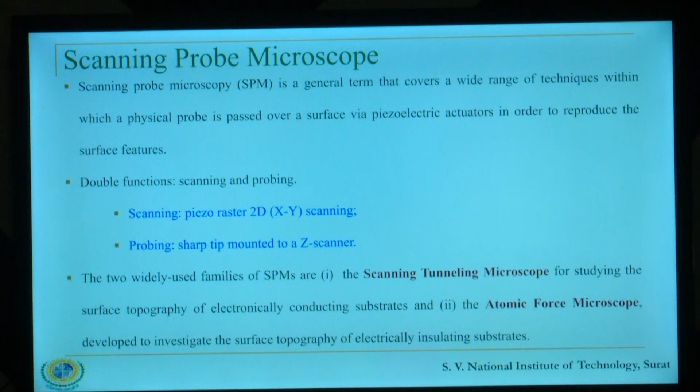So under scanning probe microscope there are two different types of microscope. One is the scanning tunneling microscope, which studies the surface topography of conducting materials, and then you have atomic force microscope, which is used to study the topography of insulating materials. So basically the task involved is to scan and then to probe, measure along x, y and z, but the major difference is in the way the tip for the z movement is arranged.

So in case of the scanning probe microscope, the tip is brought very close to the surface, but it does not touch. It creates a sort of attraction between the atoms, and because of that it is also being used to displace the atoms. So in a way this is also used as a nano manufacturing technology. Your intention is to scan the feature and to observe the feature, but while doing that it works at such a level of angstrom that it is able to replace atoms.

So there are few images which are usually used with this, wherein those atoms are replaced and somebody has written IBM with those atoms. That image is always viral when people discuss this, especially BTech students use it for their presentations. So in case of these two, atomic force microscope and scanning tunneling microscope, in one case you want to measure the interaction force between tip and the surface, and in the other case you are trying to measure the electrical current that flows between them once they are brought very close but slightly apart.

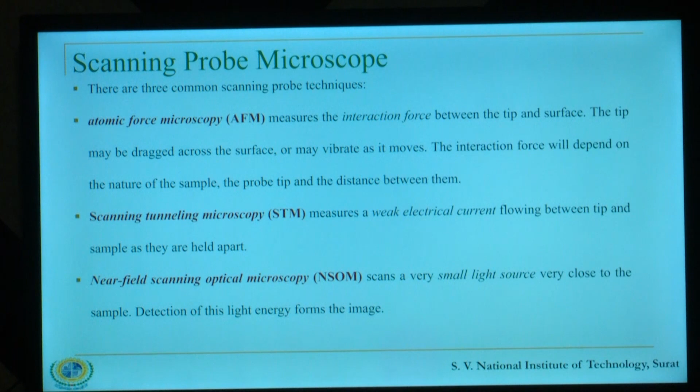So there are two ways in which we do this. In case of STM, the sharpened conducting tip is used, and in case of AFM, a cantilever sort of thing is used. That cantilever is also not too big, but because of that it is able to sense the Z feature, and that helps to give you the X, Y and Z positions. So there is a physical contact that happens in case of this cantilever AFM, whereas in the other case there is a force of attraction in between, there is no physical contact happening over there.

So, there is a force of attraction. What is also needed is a very clean sample. Yes.

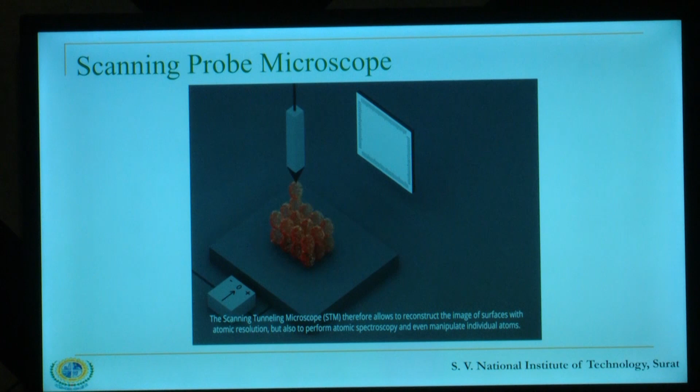So, I will move to next. This atom is now being shifted; while the intention is to measure, because of that force of attraction, the atom gets attracted and gets shifted. So, there are few papers where this setup is attempted to carry out nano machining. So, your intention is to move the atoms. The animation looks very attractive, but it is not that simple a task, and probably it is even difficult to observe.

I have come across like tweezers, the optical tweezers, something similar? Okay. No, I don't know about that.

Contact mode is the most basic mode of atomic force microscopy for measuring topography. In this mode, the cantilever scans while applying a constant force onto the surface of the sample. As the tip approaches close to the sample, the tip eventually contacts the surface. Once engaged, the cantilever bends upwards proportional to the amount of applied imaging force. So, because of this deflection, as the tip passes over the topography, the image is generated. So, here the thing is it touches the surface.

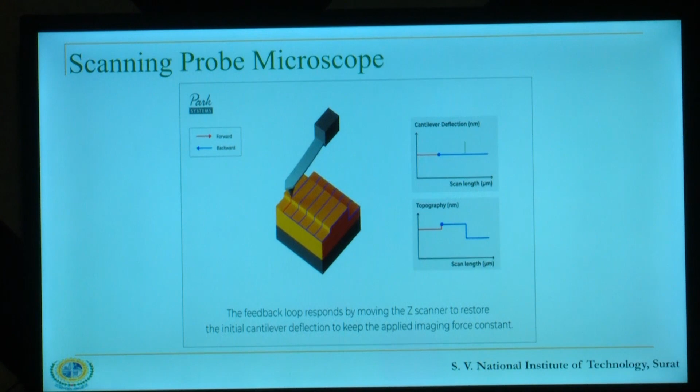The deflected laser spot on the position-sensitive photodetector will move due to the change in contact force. The feedback loop responds by moving the Z-scanner to restore the initial cantilever deflection to keep the applied imaging force constant. By tracking the displacement of the Z-scanner, you can ultimately determine the surface topography of the sample.